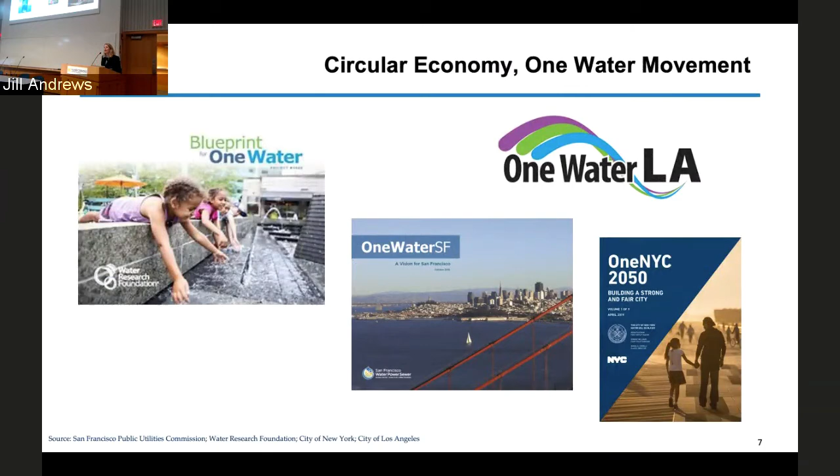But in San Francisco, we've been working hard to diversify our portfolio. We've been promoting conservation for over 25 years. Our residential per capita use is 41 gallons per person per day, one of the lowest per capita rates in the entire United States, about half the statewide average in California.

That's really been a partnership between the utility, the public, and our community about using water efficiently. I recently was at a presentation in San Diego where the County Water Authority surveyed their public, and people said it's their civic duty to conserve and use water efficiently. So we're starting to see a partnership with our community, and a responsibility from them to help us solve our water challenges.

We're also pumping groundwater. San Francisco historically used groundwater back in the 1920s for drinking. We brought on our large centralized infrastructure system, and then stopped using groundwater for potable purposes, just for irrigation. But now we've gone back to pumping that groundwater, blending it with our surface water supplies to make our system more resilient, add additional supply, and most importantly, use the right water for the right use.

That groundwater is high quality groundwater. It shouldn't just be used for irrigation—it should be used for drinking. So we're replacing that irrigation water with recycled water, taking wastewater and treating it for irrigation of our golf courses and parks in the city. We're also starting to look at purified water in San Francisco, taking wastewater and treating it to meet drinking water standards. I'll talk a bit more about that later.

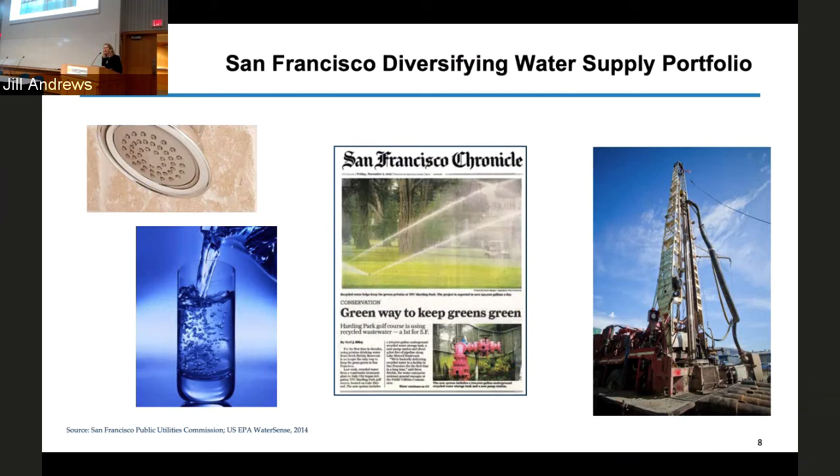But we also decided we wanted to think outside the traditional types of water sources that communities and utilities pursue, and that's really at the building scale. We recognized there's an opportunity to rethink how buildings are designed, and reimagine how water is used within the building. Buildings generate many different types of what we call alternate water sources—they're resources, not waste.

They generate rainwater, which we define as water that hits the roof, and stormwater, any water that hits streets, sidewalks, or parking lots. There's also foundation drainage—nuisance groundwater—common in San Francisco and many communities, where sump pumps in basements prevent flooding, and that water just goes to the sewer system. We're talking about millions and millions of gallons of nuisance groundwater discharged to the sewer system every year in San Francisco.

Buildings also generate gray water—in California we have a specific definition: water from clothes washers, bathroom sinks, and showers. And finally, buildings generate black water, or wastewater, from toilets, dishwashers, kitchen sinks, and gray water, all of which normally would just go to the sewer system. But if we think of these sources as resources, collect and treat them appropriately, we can reuse them for non-potable purposes like toilet flushing and irrigation.

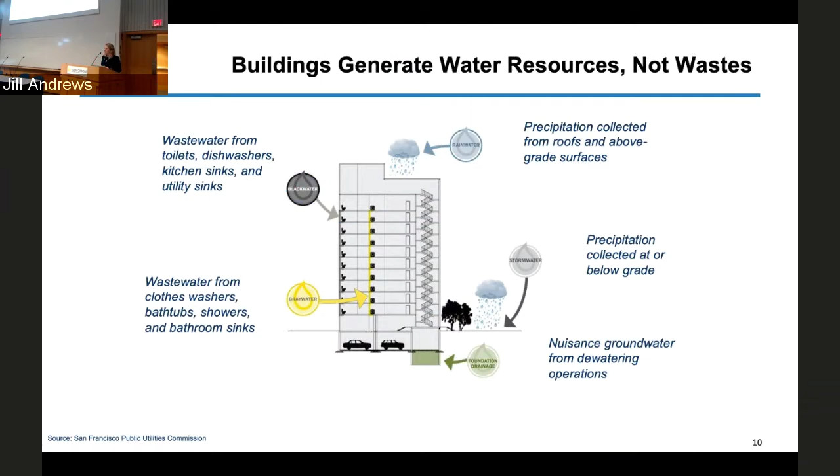So in San Francisco, we decided this is a great idea—now what do we do? We had an idea, but knew we needed to move forward with it as a concept. This started in 2010, and this is our roadmap. In 2010, we did research, which I'll talk a little bit about.

We went into interagency coordination and stakeholder outreach, and ultimately we ended up with an ordinance two years later.

In terms of the program concept, it was a little scary to be at a very large utility and say we want to do water differently. How do we start thinking about that? It was really just doing some research, and I found a lot of work that Glenn had written. He inspired me personally to say it's okay to think differently—we don't have to just continue with centralized infrastructure for providing safe water to our communities. I want to thank Glenn for inspiring me; it's helped me on my journey, knowing there are others out there thinking that way.

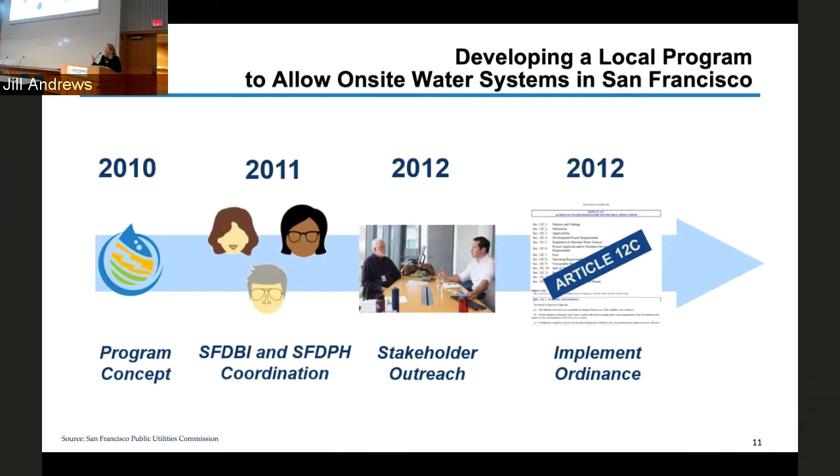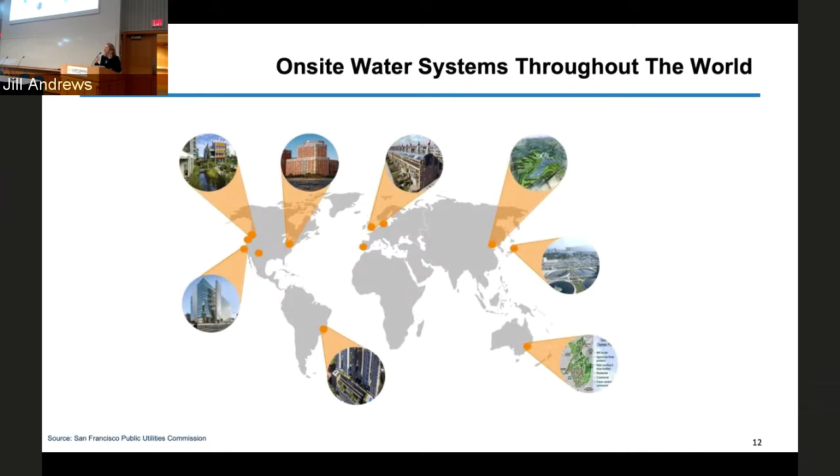In terms of moving beyond, we also did research. On-site water treatment systems in a decentralized manner, at a building or neighborhood scale, are happening throughout the world and have been online for a number of years. So this concept isn't necessarily new, it's just not common. There are technologies available today in the marketplace to collect water on site, treat it, and reuse it for non-potable applications.

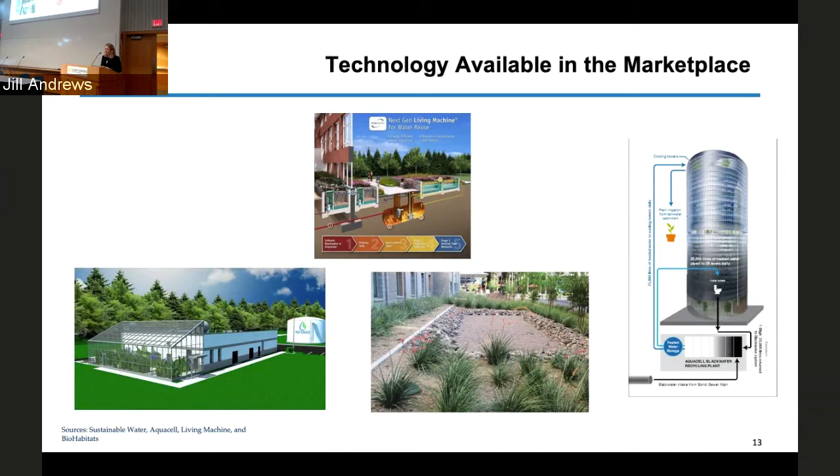There's also a desire from the private sector to install on-site water treatment systems in their buildings. A lot of buildings, certainly in San Francisco, going for LEED Platinum find that installing an on-site water treatment system enables enough points to reach the platinum level. So we had a number of developers coming to us in San Francisco saying they liked our idea and wanted to put an on-site water treatment system in their building.

We also recognized, from the utility's perspective, why this was an important and valuable opportunity within our portfolio—it enabled us to encourage really water-efficient buildings being built in San Francisco. When we think about potable water demands in a building, in a multifamily residential building only about 50% of demands require potable or drinking water, so there's significant potential for potable offsets. In an office building, it goes up to almost 95% of demands that do not require drinking water—only 5%, for washing, sinks, faucets, and showers.

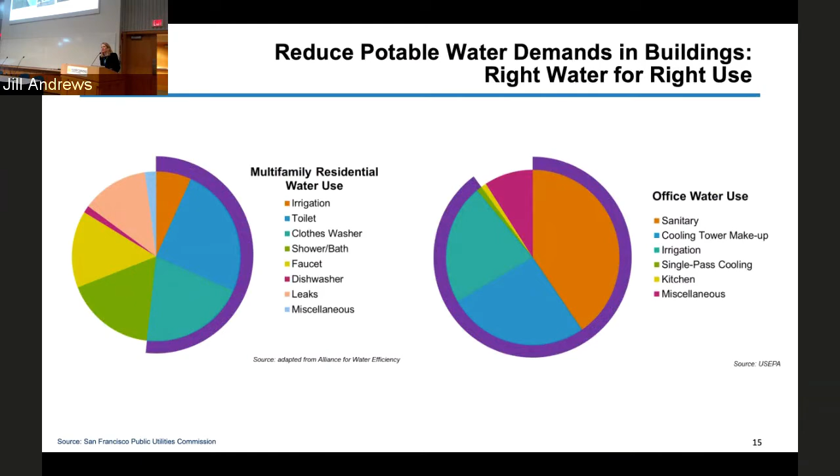So our system has enabled us to reduce our potable water consumption by 60%—a very significant opportunity to preserve and extend our drinking water supplies in San Francisco.

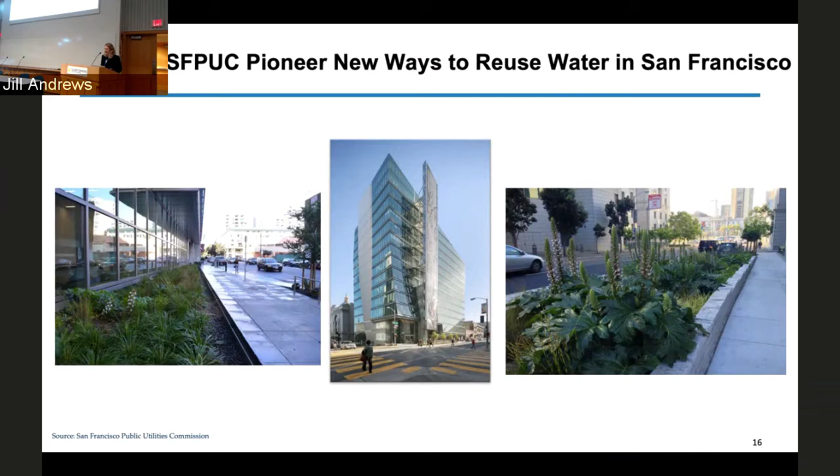We said, well, it shouldn't be just our utility—we can't just have one building in San Francisco with this kind of application. How can we scale this up? Can we see this as a more common practice? It's like installing a boiler or a washing machine in a building—how about installing an on-site water treatment system? Sounds a little crazy, but why not? Let's think about it. Can we do that?

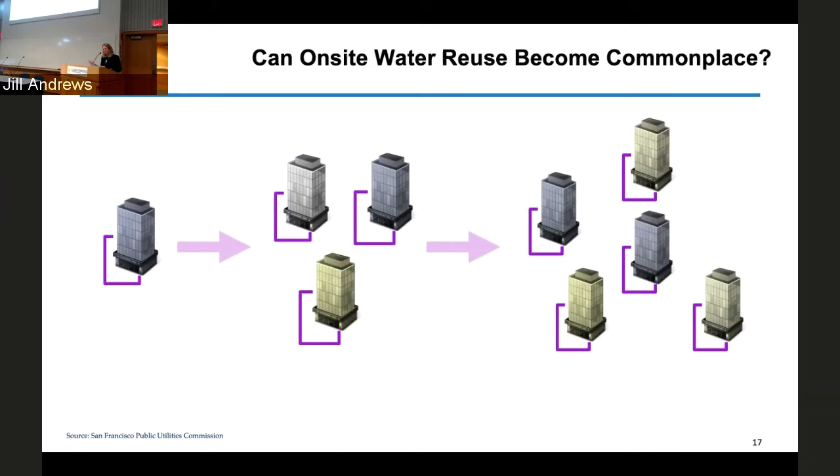We recognize, though, there are barriers. We know it's possible, we know others are doing it, there's technology and the ability to save water, but there are challenges when it came to scaling up on-site water treatment. For us in San Francisco, what we really found was a lack of regulations, water quality standards, and oversight and management.

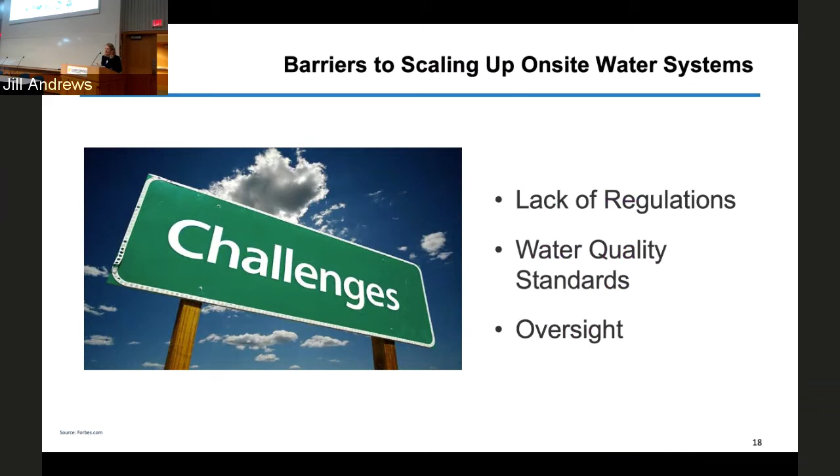So we decided to look at the regulatory landscape to understand water quality standards. Who actually issues water quality standards in the state of California? Who provides requirements for monitoring and reporting? And who oversees and manages these decentralized water treatment systems to ensure they're protective of public health on an ongoing basis?

Unfortunately, we didn't find very many answers to our questions. We found that basically, in terms of water quality for black water treatment systems, really the only reference we could find was Title 22, which in California is for taking municipal wastewater and treating it to produce recycled water for irrigation. But those are two different scales - a very large centralized scale versus a very small decentralized scale. That was the only applicable regulation we could find.

In terms of gray water and rainwater, we looked to the California Plumbing Code. There actually is a reference in the California Plumbing Code to decentralized treatment systems, both residential and commercial, for rain and gray water. Gray water treatment systems referenced an NSF 350 certified system. NSF is a certification system - it's a performance standard, not necessarily a health risk-based water quality standard for a decentralized treatment system. I'll come back to that point in a few minutes, but that was the only reference.

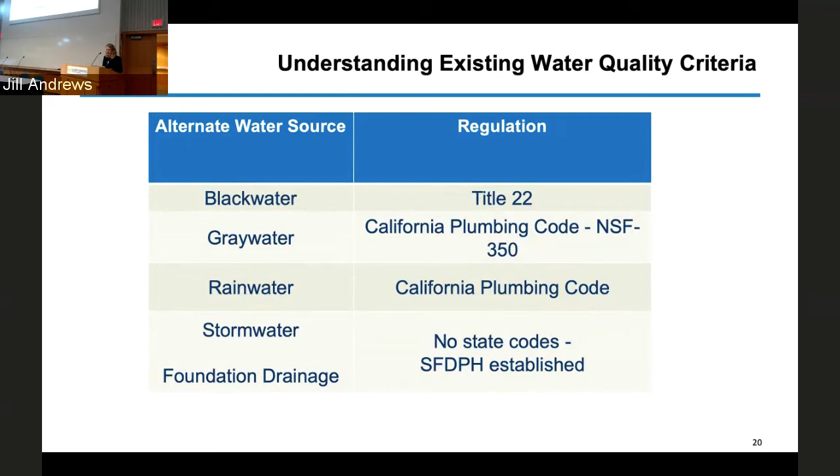Even with the California Plumbing Code acknowledging and incorporating gray water and rainwater, which was very important - so I'm not trying to be critical of the California Plumbing Code, it was very important to have a standard in there - it included requirements such as purple pipe, signage, and some construction requirements, but it did not have any oversight and management associated with these decentralized water treatment systems. Again, if we want to see more of these systems in San Francisco, we need to make sure they are protective of public health. This is a very critical core component of actively endorsing and encouraging these kinds of systems.

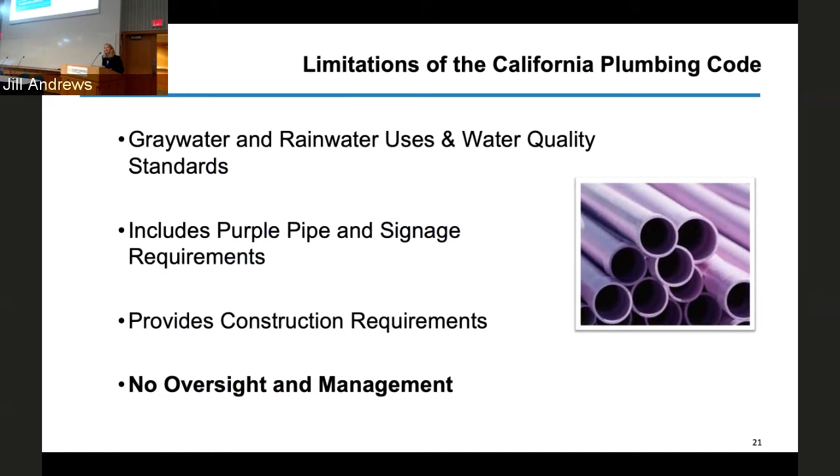So what we needed to do, and what we ended up doing, was form an interagency collaboration within the city and county of San Francisco. The interagency partnership consists of four city agencies: the San Francisco Public Utilities Commission, the San Francisco Department of Public Health, the San Francisco Department of Building Inspection, and the San Francisco Department of Public Works. We chose these four agencies because each has its own jurisdictional issues within San Francisco. Public health has to deal with health issues, the building department deals with construction and the plumbing code, and public works deals with any pipes in the streets or sidewalks.

When we started this work in this partnership, our building representative said, 'You're never going to do this. This is not going to happen. You can't do it. It's illegal. I don't want you to do it. There's too many risks and too many concerns.'

I think what's important, and a lesson to share out of this, is that we sat down together and listened to the concerns from the building department, from public health, and from public works, and through the development of our program, we addressed those concerns. In terms of developing policies and regulations, there are legitimate concerns that each of these agencies have because that's their jurisdiction - they're responsible for compliance with the plumbing code, for example. There are responsibilities, but we needed to sit down and listen to one another and really address those issues.

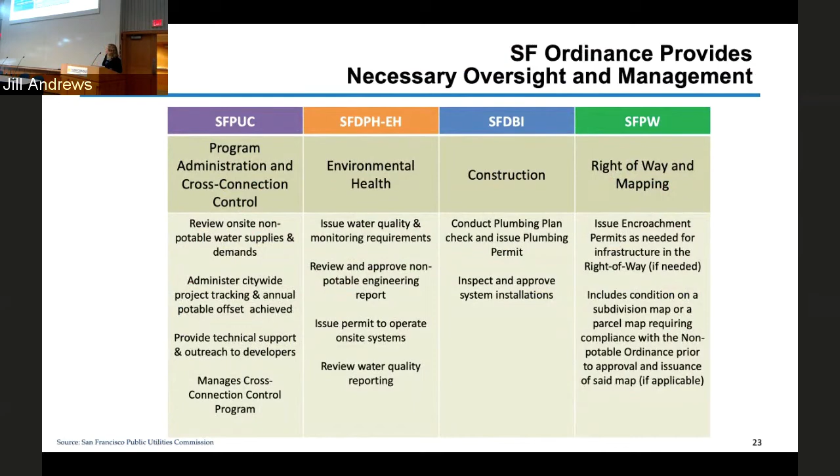The utility has developed a number of technical assistance materials to help developers. We want to streamline the process. We've developed a water use calculator to help developers understand, should I collect gray water, should I collect black water, rainwater, how about my toilets, how much of an offset will I get, etc.

We also have a grant program. Early on in our program, we wanted to encourage people. We developed the ordinance, and we commonly said that we set the table, let's see who comes. We decided that we wanted to really incentivize people to come to our table. So we do have a grant program. We provide anywhere from $100,000 up to $500,000 per project. It really has to do with the total amount of water that's saved in terms of the dollars associated with our financing.

Key to all of this is that we do a lot of stakeholder outreach. So we work with developers and we work with vendors and other folks outside, architects outside of our city family, to share with them our draft rules and regulations, our program documents, to make sure what we're saying makes sense in the real world. We want to encourage that this is really a partnership with the community, and we've been very successful. We've gotten great feedback. Our program has evolved over time.

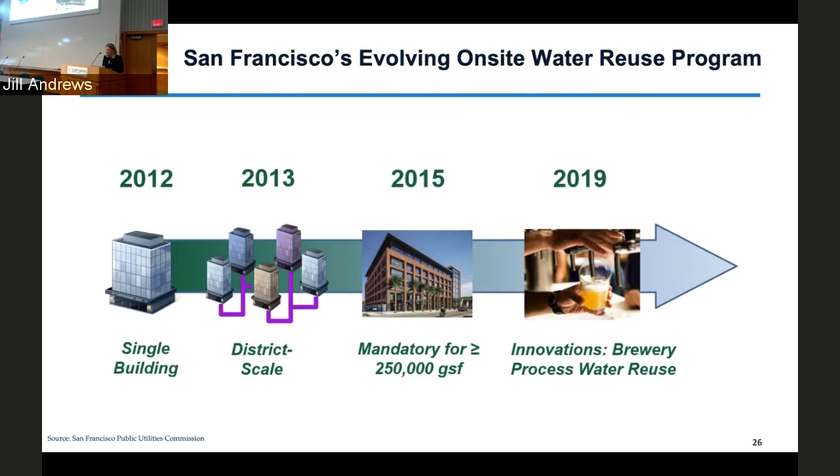But we are starting to see some very interesting applications now in San Francisco, one to share with you that's actually online. And we've also moved forward. Now we're working with breweries with the same kind of framework to recycle and treat process water, not wastewater, but process water on site in breweries. So I'll share with you a few examples of some projects that are occurring and that are online today.

181 Fremont, San Francisco — the bottom two-thirds is office, occupied by Facebook employees, and the top third are condominium units. They voluntarily installed a gray water treatment system because they wanted to become a platinum building. So they're currently collecting and treating gray water and rainwater for toilet flushing and irrigation.

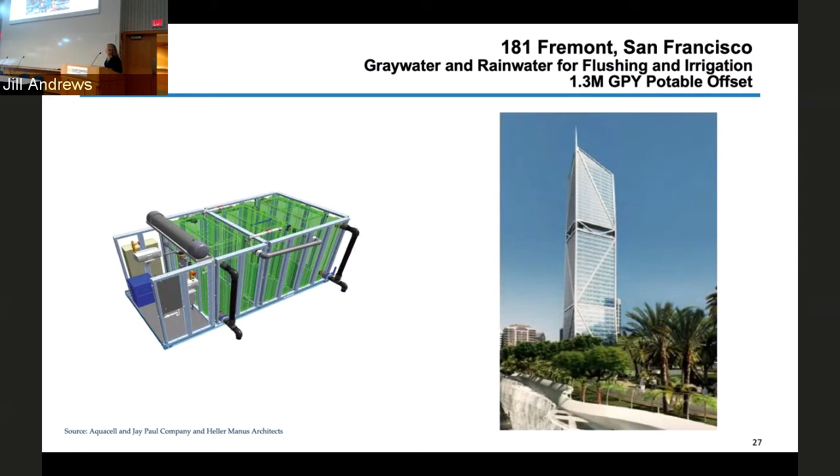We actually went to their showroom for their condos, and on their digital display wall, it prominently shows the decentralized water treatment system. We asked what prospective buyers think about this - the condos are millions of dollars. They said, of course you should be treating your own site. It wasn't the yuck factor or disbelief, it was real acceptance. People expected new buildings to be treating their own water, which I find very inspiring - we're moving beyond the concern that people might not want recycled water in their toilets.

Salesforce Tower, 1,070 feet, tallest building west of the Mississippi. They decided on a voluntary basis, as part of their sustainability corporate goals, to install a black water treatment system for toilet flushing, cooling, and irrigation throughout the building. The system is not online yet, but will be in the next month or two.

Moscone Convention Center, our downtown convention center. We're expanding their facility underneath, again with a little river of foundation drainage. Millions of gallons of water for over 30 years have been discharged to the sewer system. They decided on a voluntary basis to capture that water, treat it, and use it to flush toilets in the convention center, as well as supply a truck fill station, so our Department of Public Works can pick up treated foundation water to clean the streets in downtown San Francisco.

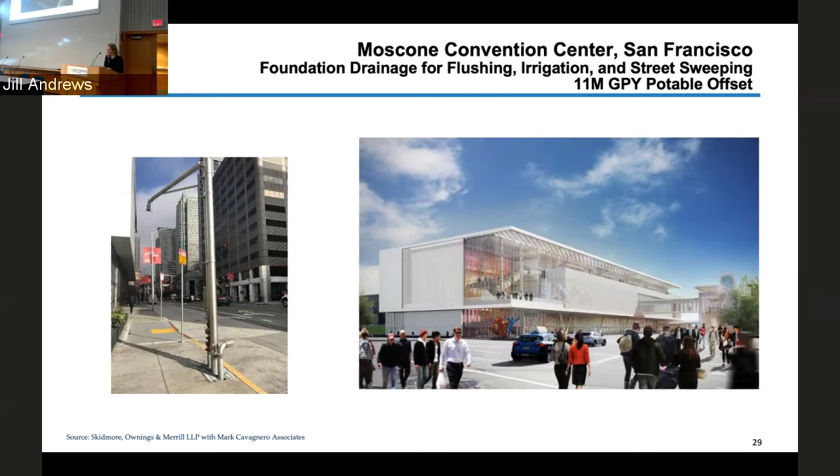Chase Center is actually a mandatory project, just came online about 2 months ago. It's a sports arena but also has music venues, and two office buildings right behind the arena. They opted to capture rainwater, stormwater, gray water, and condensate - they've gone beyond requirements, adding condensate for toilet flushing throughout the arena.

We've been working with them to add more interesting signage in the arena, given how many people come through that facility. Their signage currently says in the bathrooms, because it was on a sports radio network, 'do not drink out of the toilets.' The newscasters and sportscasters couldn't figure out why they would have signage like that, so we're trying to encourage more interesting messaging.

For example, in our building we changed our message from 'Do not drink out of the toilet' to: 'We have an on-site water treatment system here to conserve potable drinking water.' We've changed those messages, which I think is very important when talking to the general public. We need to think about these messages because people could not understand why anyone would want to drink out of the toilet - we need to think about that moving beyond our installations.

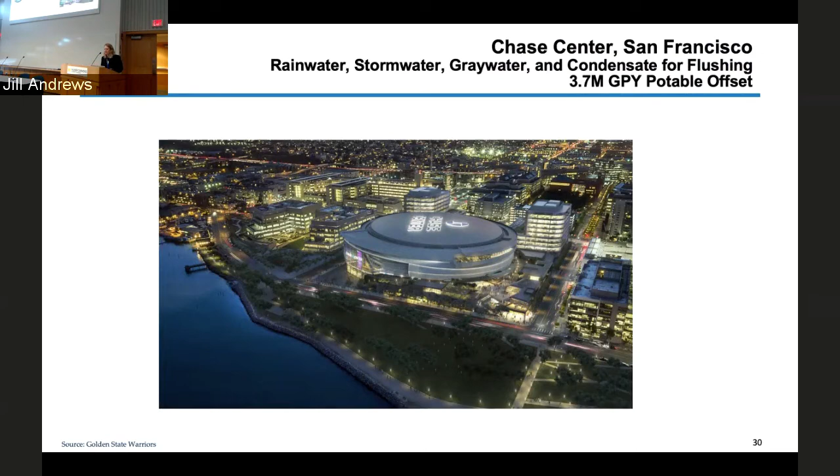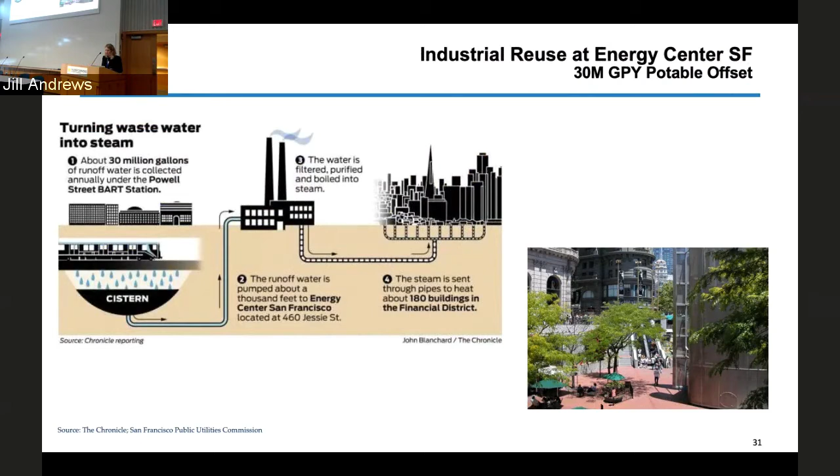Finally, one other example - this is a very, very large potable offset project. We have a downtown steam loop, an underground steam loop, and they've been using potable water for it, one of our largest industrial potable water customers. 1,000 feet away, again, millions of gallons of foundation drainage going into the sewer system. They installed on a voluntary basis a new system, using an RO system because it's for boilers serving hotels and commercial buildings downtown. They're now diverting 30 million gallons a year - instead of using potable water, they're using treated foundation water. A very significant project.

So San Francisco, though, we're not alone in this concept. It's not just us thinking about decentralized water treatment systems - it's happening throughout the world and the country. We decided in San Francisco to invite public health regulators and water and wastewater utilities, public agencies, to come talk about the concept of decentralized on-site water treatment systems in their communities. That started in 2014 and we're still going strong today. It's called the National Blue Ribbon Commission for On-Site Non-Potable Water Systems, a long name that is now being codified in legislation, so it's become its own brand.

We are collaborating, and when we met in 2014, it was the first of its kind where public health regulators came into the same room as water and wastewater utilities to talk about on-site water treatment systems, the plumbing code, and these fundamental things we take for granted. In this case, they weren't already working together, and people were excited to come together, talk to each other, learn from each other, and identify some of the challenges we face.

Our collaborative is growing in numbers. We just recently added Nevada and Idaho, and Massachusetts is contemplating joining. We have folks from across the country, and they come to the table with different drivers—some for water security or water supply challenges, some from stormwater.

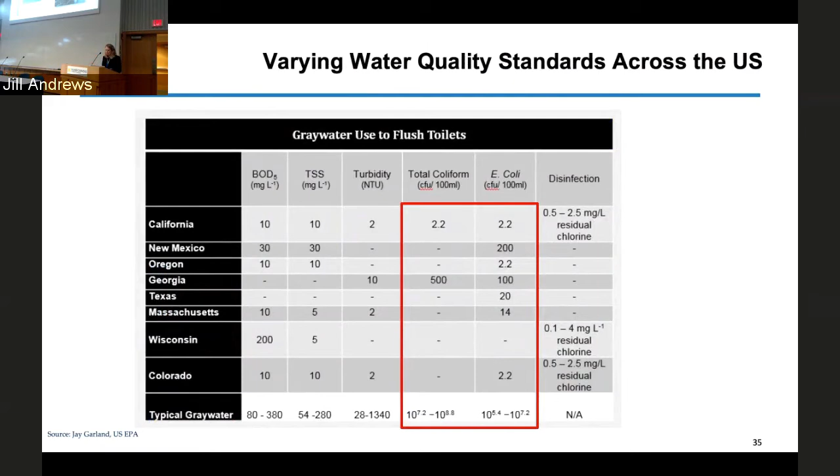A lot of public health regulators, when they came to the table in 2014, asked how these water quality standards got developed anyway. Are we sure they're the right standards to have in these plumbing codes and in place? We weren't even sure if we bought into any of that.

So what we did as a collaborative is work with the Water Environment and Reuse Foundation, U.S. Water Alliance, and our states. We went to the Water Environment and Reuse Foundation and said we'd like to do a study on the appropriate water quality standards for decentralized water treatment systems. They provided funding for us to hire an independent expert panel to conduct an analysis of what the appropriate standards should be.

The panel also worked with EPA's Office of Research and Development, part of our commission, to conduct a QMRA model looking at what pathogens are of greatest concern, and how to remove them to ensure we're protective of public health, whether from a black water, gray water, or rainwater source. What came out of this work is what we call the infamous Table 3.3—a table of appropriate log reduction target values for removing pathogens: virus, bacteria, and protozoa, which the independent expert panel felt were the three pathogens of greatest concern to public health.

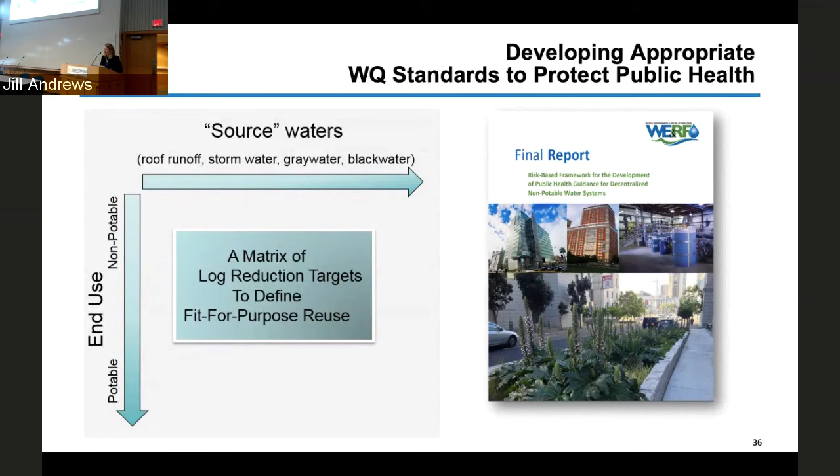It was very exciting to complete this body of work. We got consensus from all of our commissioners, across our various states and localities throughout the country, to take this same risk-based framework—this log reduction target approach—that is more protective of public health. So we've developed model regulations for states and local communities, all based on this research for risk-based water quality standards.

We're starting to see states and locales move forward, so we're very excited. San Francisco has adopted this, and Colorado has amended their Regulation 84, which now allows decentralized black water treatment systems in the state of Colorado.

California passed statewide legislation for new risk-based water quality standards. Hawaii has also adopted legislation for risk-based water quality standards. Minnesota and Washington, D.C. have guidelines for their stormwater programs based on the same approach. Washington State and Oregon, Pat's working very hard to make this happen, passing legislation this year or next, using the same framework. Texas and Alaska are looking at this as well, so it's very important to have consistency from state to state. Whether you're in Minnesota, Colorado, or California, we're all approaching it from the same perspective, and we anticipate this will grow even further.

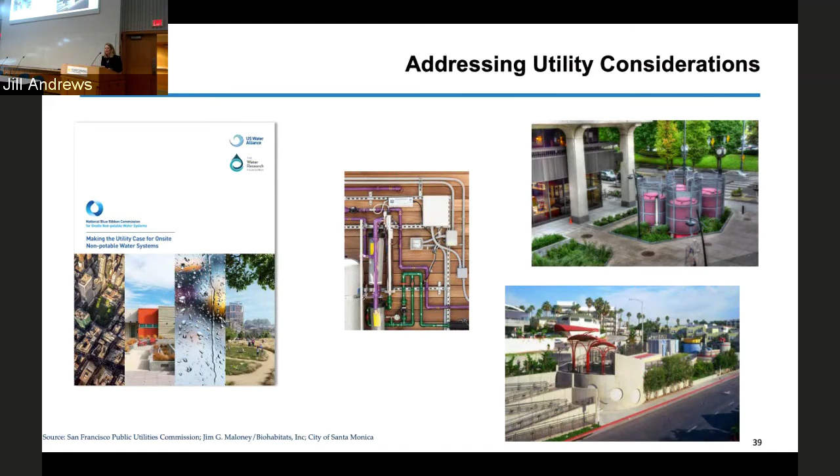I talk a lot about this, and I've been in a lot of debates and discussions with utilities. I have some scars from my work, but I do think it's very important that we continue to think about decentralized treatment from the utility perspective, and we are starting to see that now.

Austin, in their Water Forward plan, is committed to developing 10 million gallons a day of water from decentralized water treatment systems. Denver Water is putting a living machine similar to our system in their new headquarters. Other places include the City of St. Paul, Vancouver, and Portland's Hassalo on 8th, which I highly recommend visiting. That project was all about preventing discharge to sewer issues. So it's happening, and it's happening from a utility perspective, which is really transformational and important at this time.

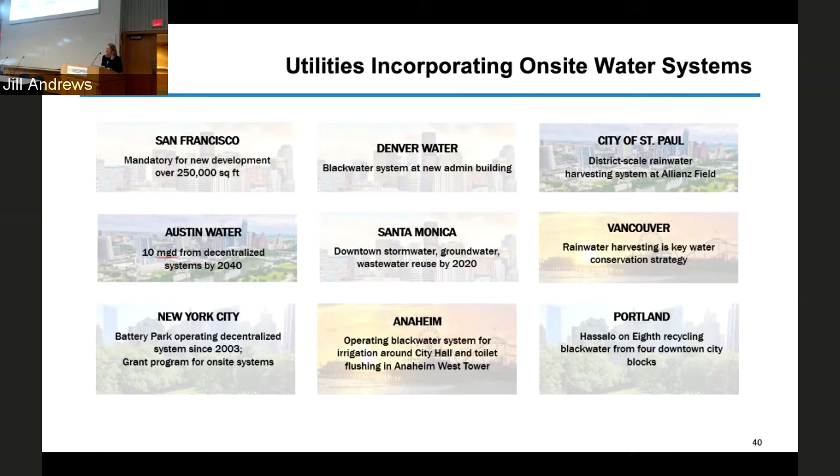We're working on a training manual to help engineers, designers, regulators, and owners of these systems really think about how to put these treatment systems together. Frankly, we feel like we're at the beginning of our journey. We are not done, we're far from being done. But we've had a lot of progress, and we're excited that we have consensus among our public health regulators and utilities to move towards this risk-based framework. It's very important to have this consensus.

In the recent draft EPA Water Reuse Action Plan, they've highlighted our work in that report and agreed with the fit-for-purpose concept. We're very excited that this is lining up with the national effort. Our long-term stretch goal is for EPA to have guidelines using the same approach we're taking in these various states. We also feel that consistent standards nationwide will help market demand, ultimately leading to more cost-effective, energy-efficient treatment systems with a smaller footprint.

Our current work, aside from the training manual, is looking at plumbing codes. We're working very hard with IAPMO, ICC, and NSF, hoping to change the plumbing codes so we don't have the problem of a plumbing code referencing NSF 350, which is a performance standard and not a risk-based water quality standard. We're making strides, so we're very excited. We're not there yet, but we are making progress.

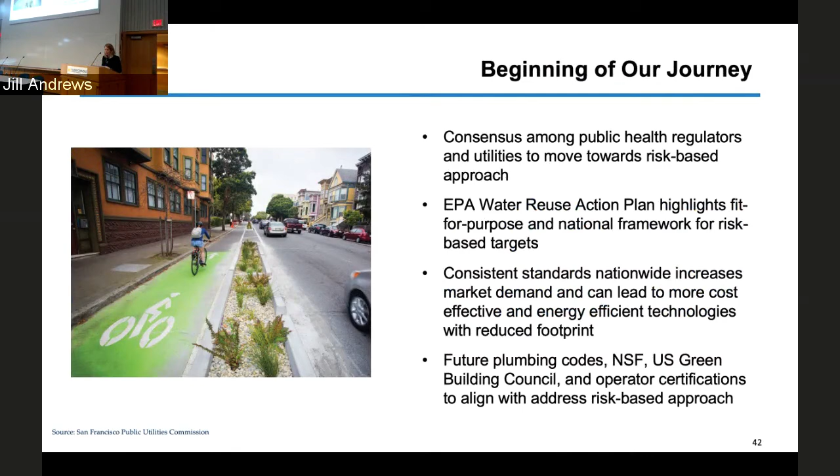Just my last minute, I'm going to talk about where we've expanded this framework in San Francisco for process water and breweries. There's no oversight - it's not under the Food and Drug, it's not under Division of Drinking Water. It's in no man's land in terms of how do you collect process water. It takes 7 gallons of water to make 1 gallon of beer, lots of water. So we just developed our own chemical and pathogen control strategy in San Francisco. We did try to do statewide legislation for California. We weren't successful, but we're hopeful we can come back to that because there's a lot of opportunity.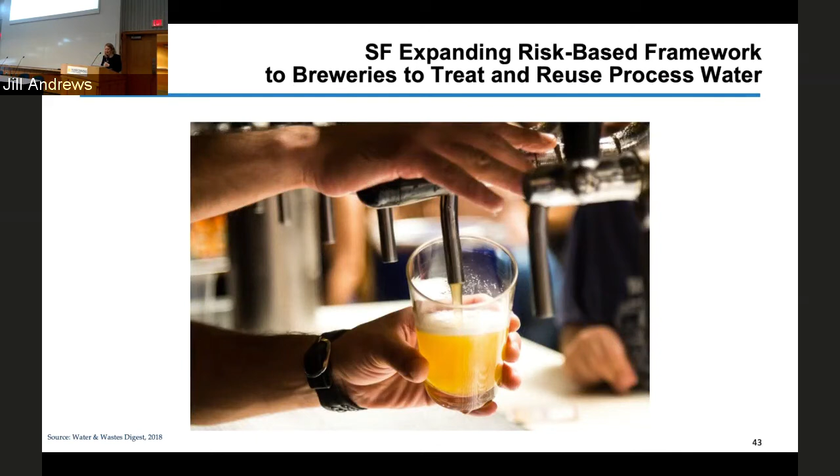In our building, we are treating our water to flush our toilets and urinals through our engineered wetland treatment system. However, we recently got grants from Water Research Foundation and Bureau of Reclamation to treat that water to a higher standard to meet drinking water. So we've added additional treatment in our building. In the basement, we have ultrafiltration, reverse osmosis, and UV, and we are producing water that's comparable to drinking water.

And so we just had a tasting in our building. It was very, very exciting. Most everyone drank it. We're looking forward to continuing those kinds of research projects and discussion. We're not drinking the water in the building - it just goes back to the toilets, but we have a 5-gallon jug that we've saved for the folks that want to taste it.

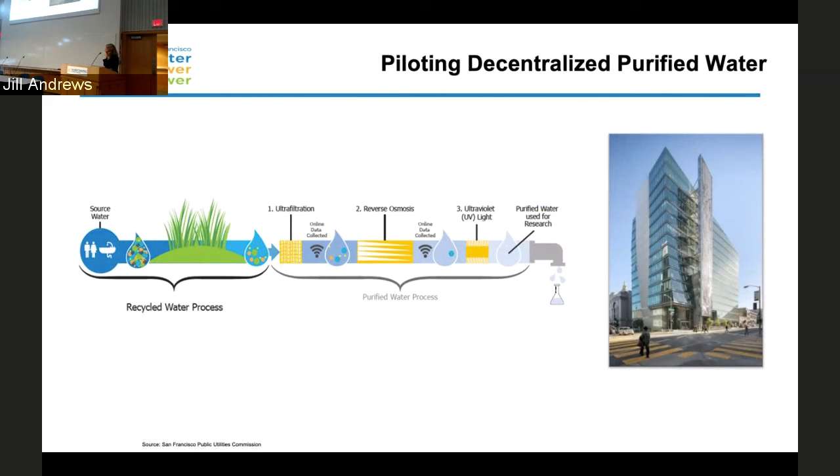We're also looking at atmospheric water generation technologies. There's a lot of old traditional passive technologies, fog catchers. Actually, in the East Bay in California, there's a vodka, Fog Point vodka, that's produced from fog that's captured in San Francisco. It's very good, and we want to think about those kinds of applications in San Francisco, either the fog catcher or a solar panel. The one on the left is zero mass water. I'm sure you've read about it, certainly in Flint - they're looking at a bottling water plant with zero mass water panels. And so we want to think about that application in San Francisco.

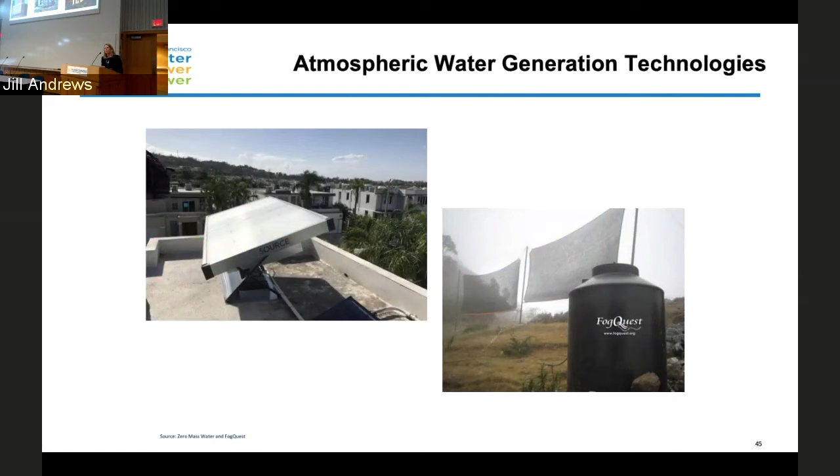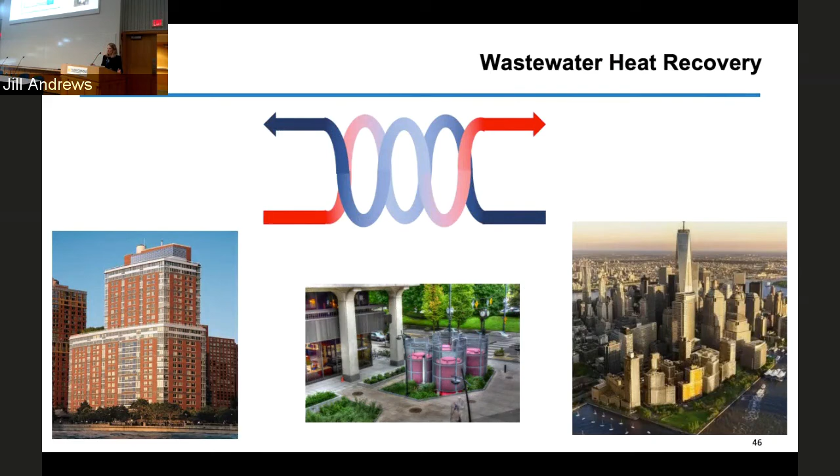We want to also be able to engage with the community. Our grant program, we are amending that program right now, and we are going to incorporate a heat recovery component in the program. So if you're going to be getting funding from us, you will be required to do heat recovery for these decentralized water treatment systems. Certainly an opportunity to produce thermal energy. And opportunity is the word - we have lots of opportunities. It's a really exciting opportunity, and a lot of things to create a new water paradigm for all of us all over the place.

I have those toilets up there. We did try to partner on a project for some urine diverting toilets at our airport. Unfortunately, we weren't successful in that funding, but our door is still open, so we would welcome an opportunity to see if we can see that kind of application in San Francisco and where that could take us.

On a side note, there is a company that started up in San Francisco to take the biosolids, the sludge, from these decentralized water treatment systems. They're undergoing testing for that, and their plan is to potentially pick up the solids from the various buildings in San Francisco and produce fertilizer. So they are on their way of doing that project. Their name is Epic Cleantec, if you're interested in looking them up. They've done a lot of work, and they're continuing to do that as well.

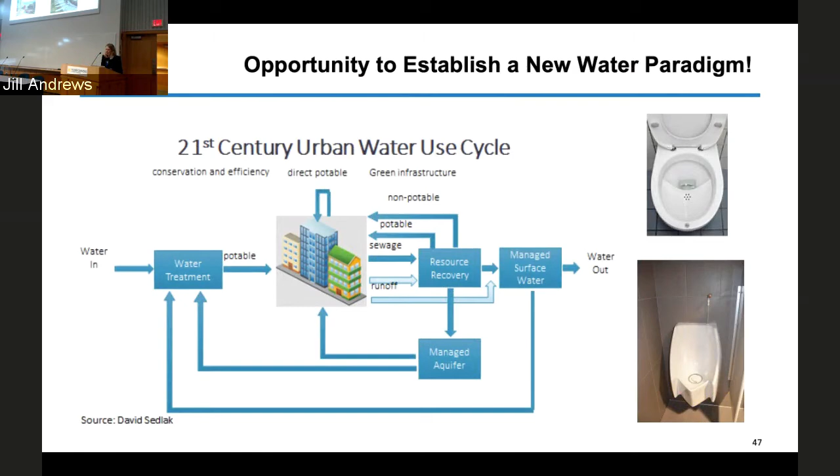But again, I think it's still an exciting time. We have lots of challenges, but there really is the ability to reimagine and think about our water systems in a way that we can really adapt and change them. It takes hard work, it takes collaboration, it takes motivation, but it can be done. We're certainly seeing that in San Francisco, and we're very excited about that, and we look forward to more opportunities.

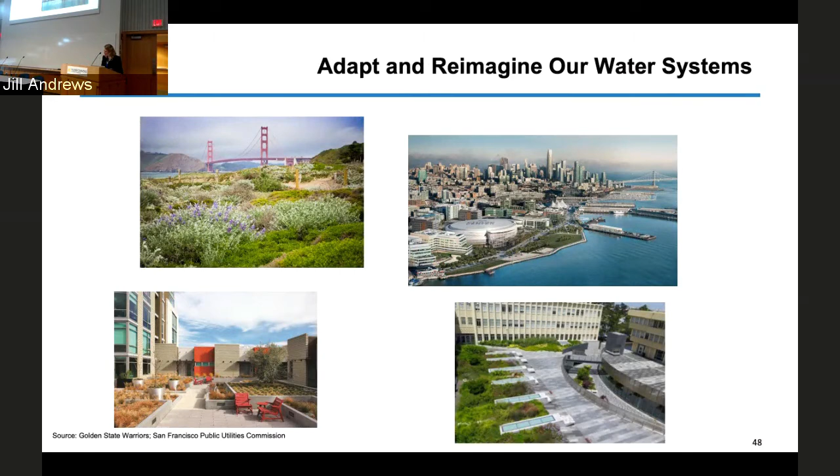Thank you, Jill. That was inspiring and exactly what we wanted to hear. I hope Enrique was listening. Risk-based framework, so now he knows why I've been pushing this.